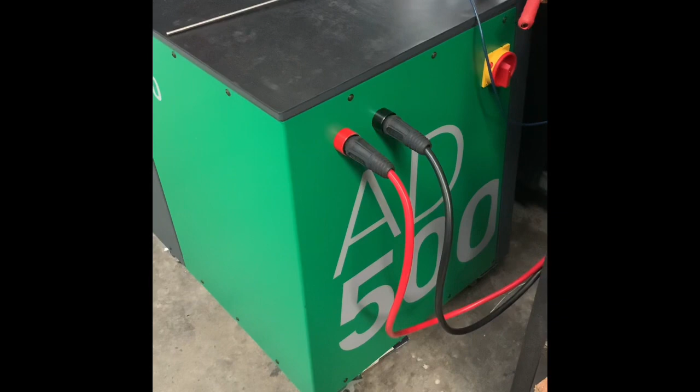So here we have it, the AD500 from Autodiagger in Poland. There's our battery connections there, which are the leads which go to the alternator case and the power feed, used on the starter motor as well. The big emergency stop button for if anything sort of turns pear-shaped.

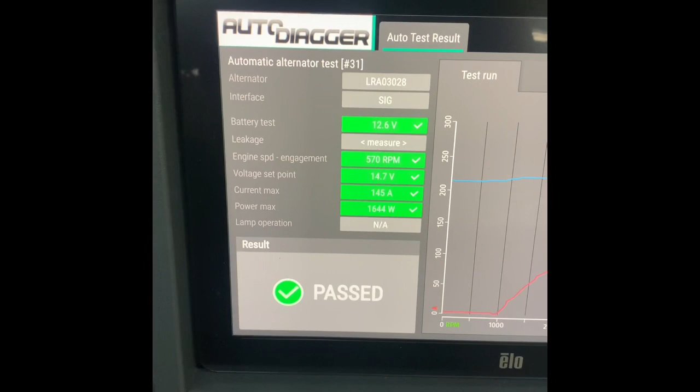This is the screen here, which has an interface to show us what's been happening, current versus voltage, and a couple of other tests there which show up red or green depending on if it's a pass or a fail. So the last alternator that I did actually was a pass.

Down here is where we connect into the alternator for various different things. We have a battery feed, a W, which is for your wave, your phase terminal, your DFM, which is your feedback terminal. This is a percentage of how hard the alternator is working to achieve the voltage. Your COM terminal, which we'll be using for COM and LIN BSS systems, but this is also the terminal you use if you're doing an RVC GM or an SIG Ford system, and your traditional lamp there as well.

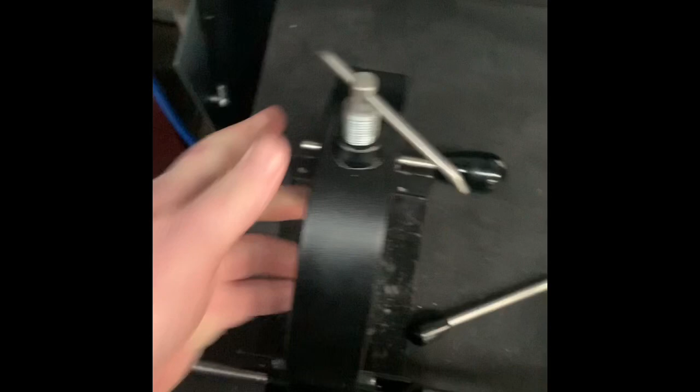Has a hatch here. Put the hatch down and you can use the machine. If the hatch is up, you can't use the machine, just for safety. Has a mounting system here, a couple of different adapters. This stuff all slides, adjusts, screws down, so it's very much a multi-fit. So there hasn't been anything that I haven't been able to put in here, or that I've struggled to put in here. It's all been fairly straightforward.

Here is the belt. And the belt is wrapped around the motor at this moment. The motor actually has an automatic adjuster, so all you have to do is slip the belt on the alternator and push the button, which is here, and it auto tensions the belt. What I'm going to do is I'm going to get an alternator into the test bench, and once I've done that, I'll start back up again and come back to you.

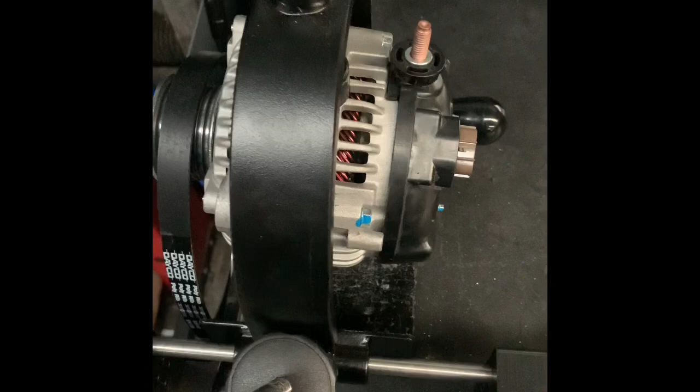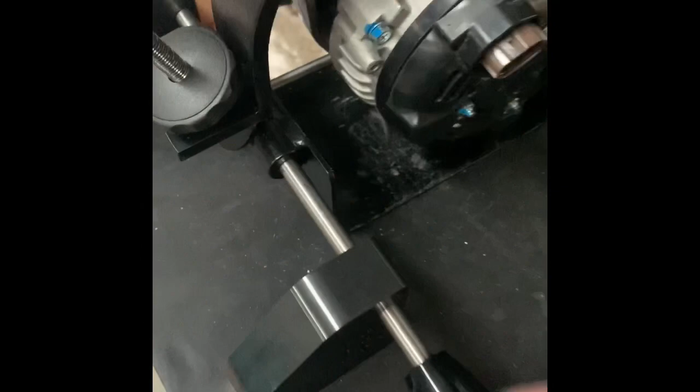Hey guys, we're back. As you can see, I've got the alternator mounted in there. It's like a clamp style system. A couple of rods in here to help hold that all together. Some adjustment rods there. Then we've got the thread there which clamps it down, and then the thread on the top there which you can tighten up the alternator.

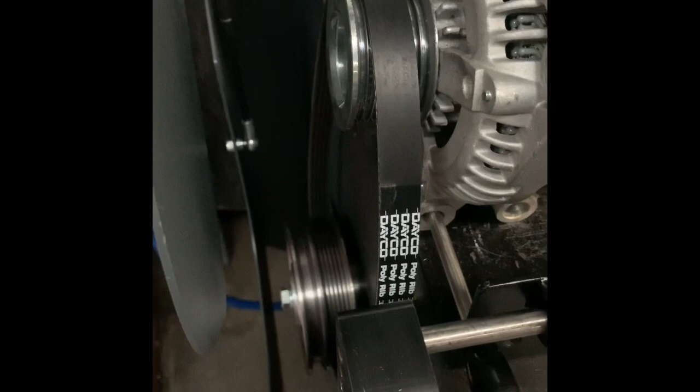The next thing is the belt tensioner, which I'll just tension up now so you guys can see that in operation. And it automatically tensions the belt for us. That's handy. We're going to be testing an alternator today, which is off a Land Rover. So it's the Ford SIG system, 3-pin plug there.

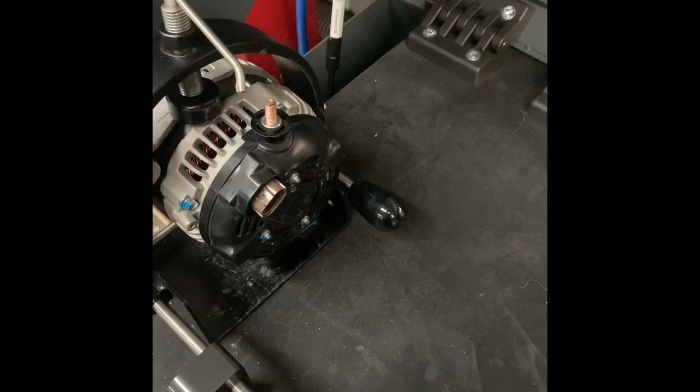We've got this alternator to check. It's an aftermarket alternator already that's been fitted to a Land Rover. It's been on the vehicle for approximately 8 months, I think. Customer has been having issues with it, and the original person to fit it is denying any sort of warranty on it. So we're actually getting it in to do basically a test on it, confirm that it is actually faulty, and the customer, the owner of the vehicle, can fight it out with the supplier of the product, which wasn't us, it's one of our competitors.

Generally they're pretty good, so not sure what's going on there. Anyway, not for us to say.

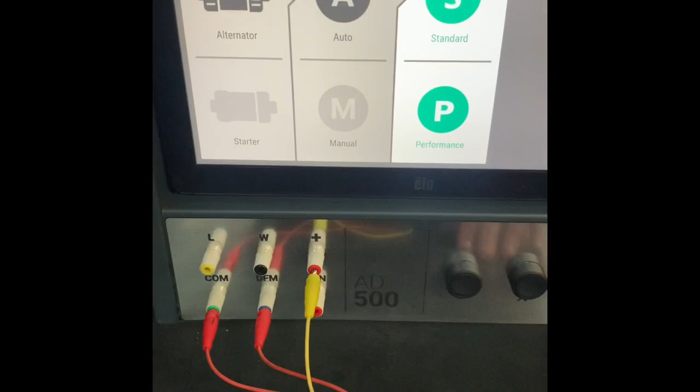We'll plug the alternator in, 3 wires for the Ford system, which is your battery feed, your feedback, and your command signal. Connected into the machine here. I'll select the alternator. What we're going to do is an auto test. We're just going to do a standard test for now in this video, because I just want to see what this alternator does under a standard test.

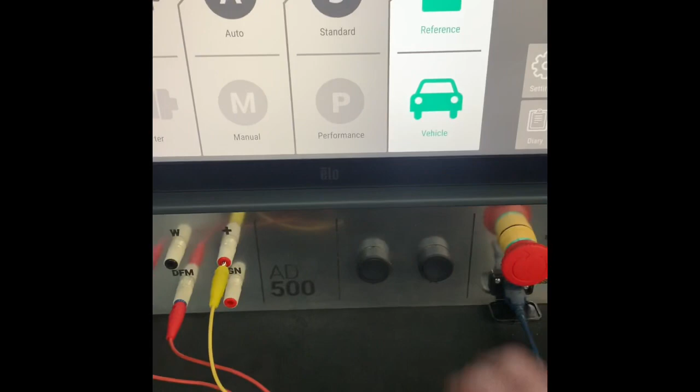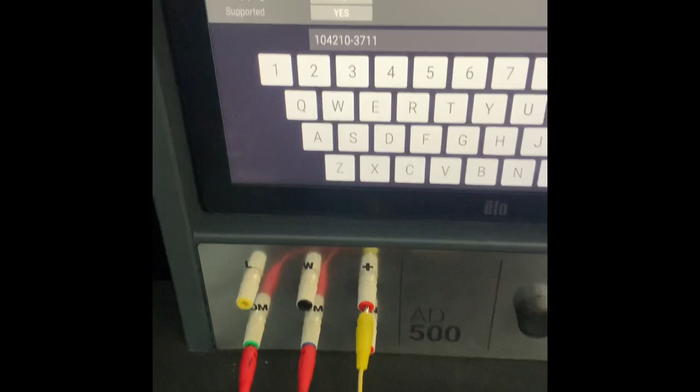Reference: this alternator doesn't have an OEM part number, but I've managed to cross over the supplier's part number to something that's pretty close. The only difference is the supplier's one doesn't have a clutch pulley, but the part number that I've got here is an alternator that does have a clutch pulley. However, the alternator pulley diameter is identical, so I don't think this is going to be a problem. And that's the alternator number we've used.

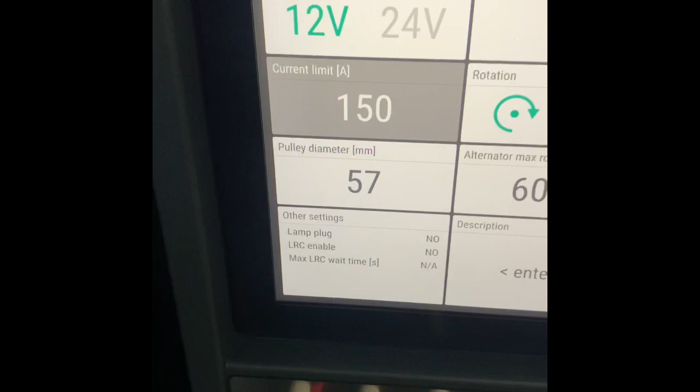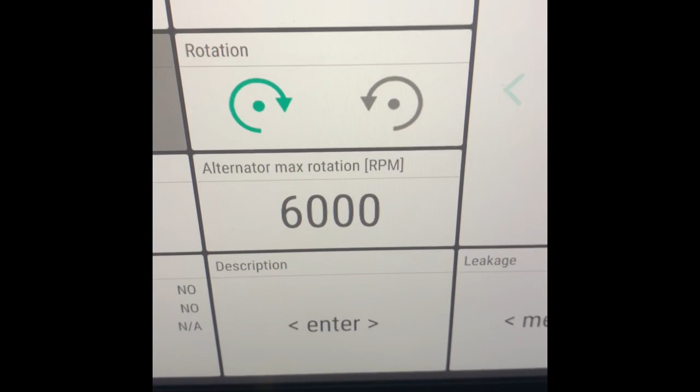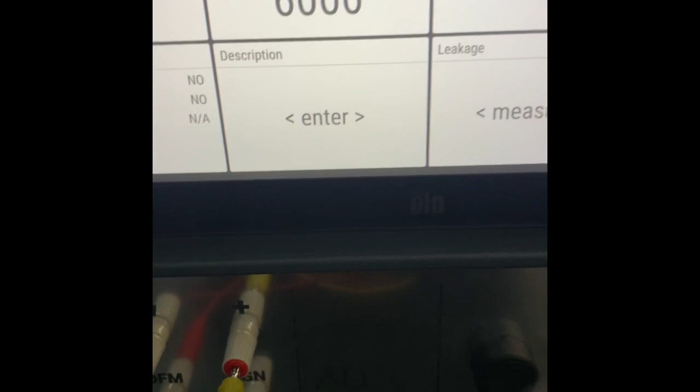Okay, so we're testing 12 volt. It's going to be a current limit of 150, which is what these Land Rover alternators are. Rotation is clockwise. The interface system is SIG, which is your Ford system. Pulley diameter of 57 mil. Description. We can put in here any description. We'll just do Land Rover alternator, or Land Rover.

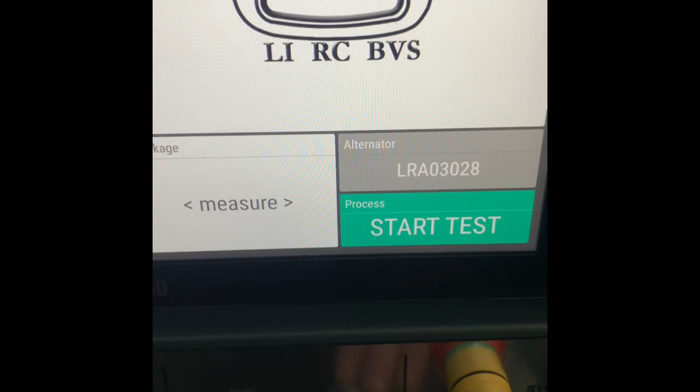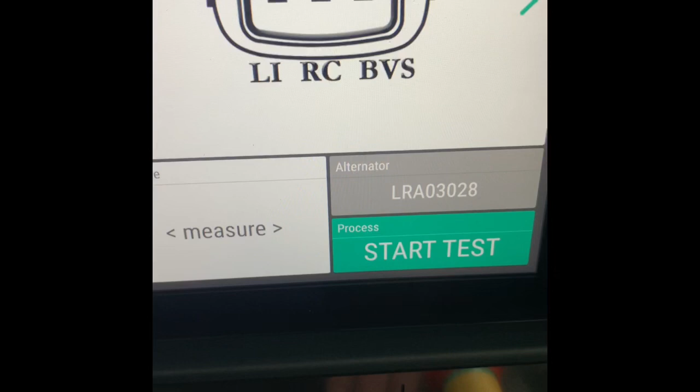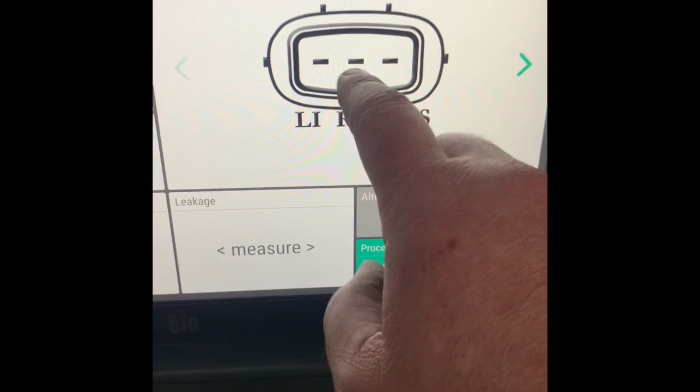Okay, this is our connection system, LIRCBVS. This is the same system that the Americans use. The terminal designations are called something different. Between the European Fords, the Australian Fords, American Fords, and Land Rover and Volvo, they can be called something different, but the pin placement, those terminals all do the same thing throughout all of those different systems. Well, when I say different systems, the different names that the different manufacturers give them.

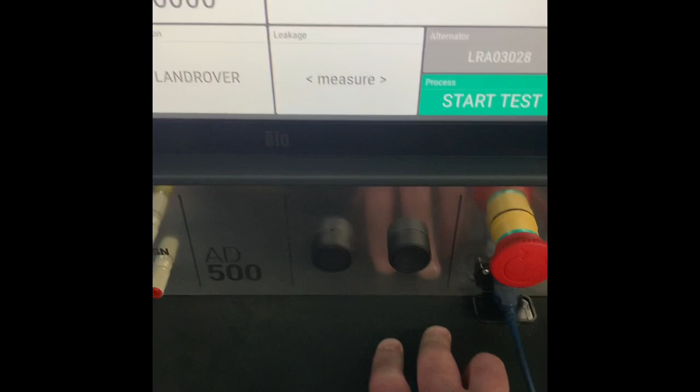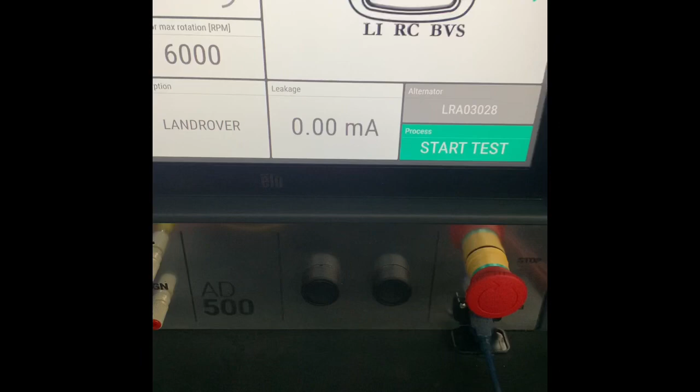Right, so we'll just hook up the power feeds and the ground onto the alternator. We're just going to get a good connection here. Okay, so we've got the alternator connected up here with our power feed and our ground onto the body. What we're going to do is we will do a leakage test. This will just check the static current draw of the diodes, just in case there's any of them out. Hoping it should be 0. That's it. Right, now we can start the test.

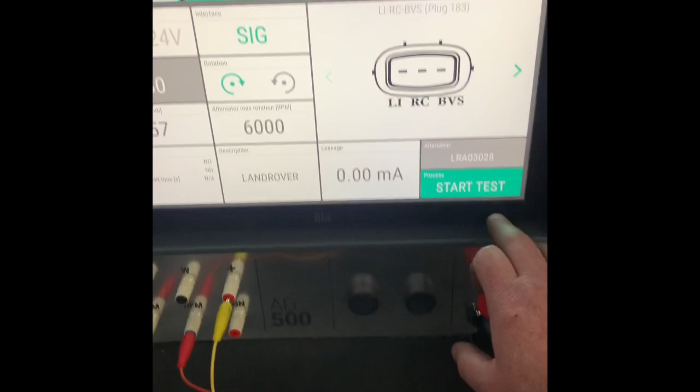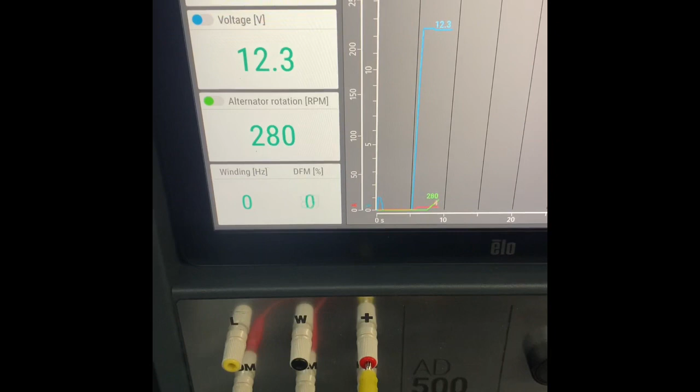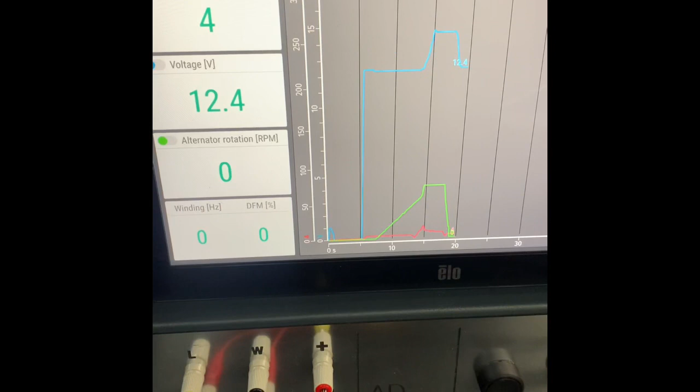First of all, we're just going to close the hatch, lock it up. Belt's tight, and here we go. We're going to start this test. So the machine's going to connect the voltage up. Clicks away, 12.4. It's going to start rotating. DFM terminals at 94%, which means it's working really hard already because of the slow RPM. As the RPM increases, it comes down, whilst there's little current load.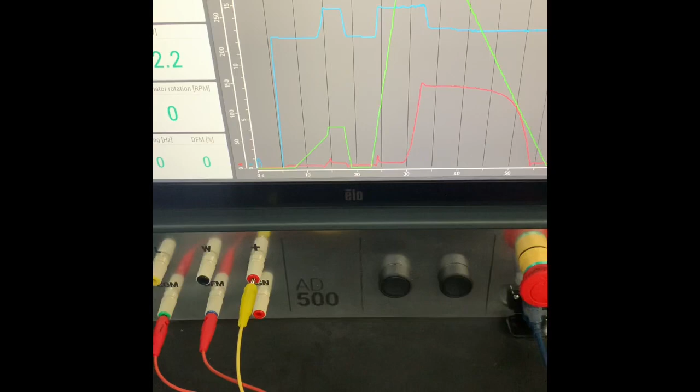Well, we certainly didn't get the 150, I don't believe. I don't think I saw that 150. And as soon as any sort of decent load, 130 or more, came on, the voltage just dropped away, as you can see there with our graph. So I'm expecting this to be a fail. Yep, and it was. And that's a failed test. So we can print that up the top there.

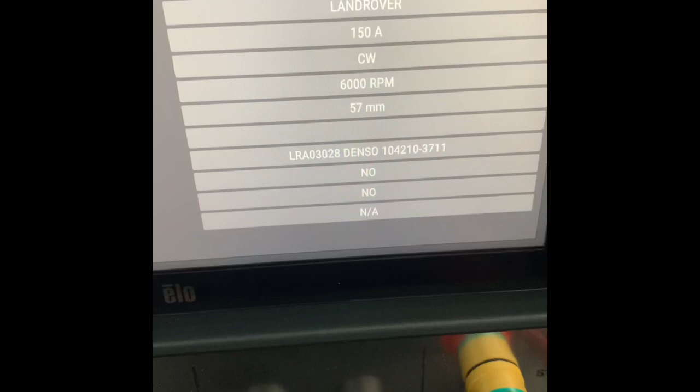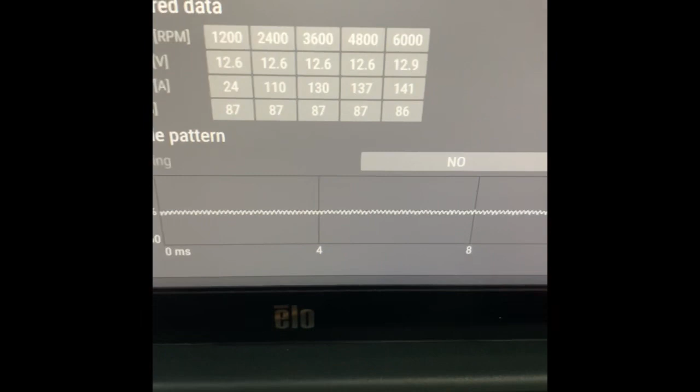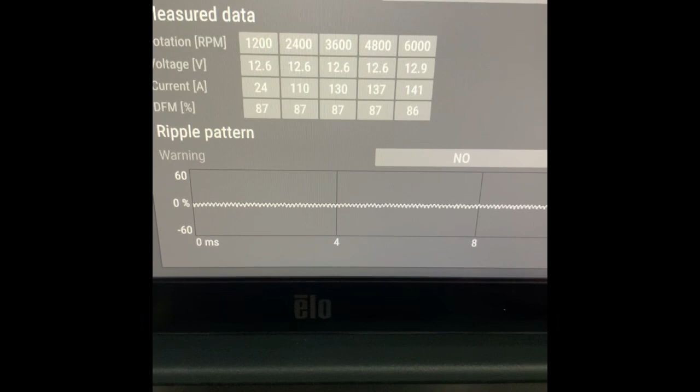We can go through the setup, stuff that we did before. Time on this machine's out because it's not 7:30 at night. It's probably only about 3:30 in the afternoon. I'll have to set that up. And click on to other. Bits of information there. Any warnings? No. The alternator ripple. Pretty good.

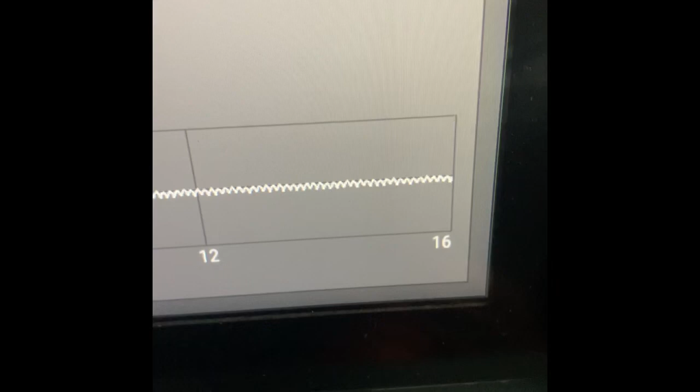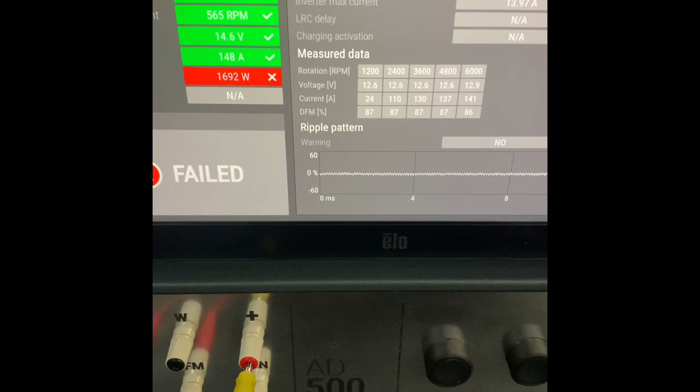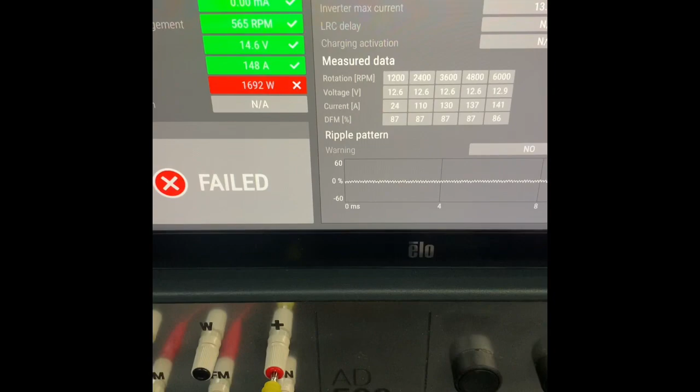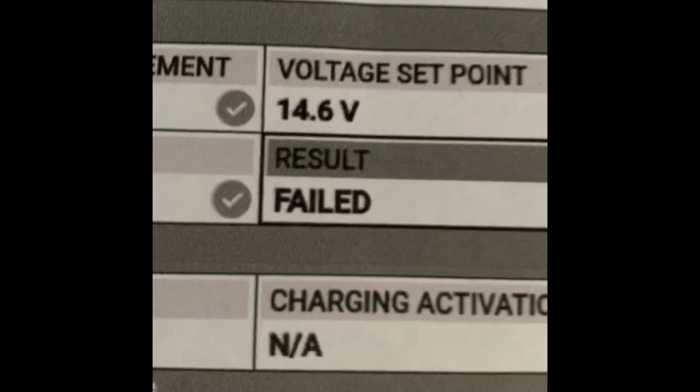So what's our issue? Well, we'll have to do some further testing on the alternator to confirm that, but that's really not what we're doing. That was for our client to go back to the supplier and say, just don't think that this is working correctly. So there you have it. Here's our AD500. Here's the printout sheet. It gives you all the information. Result: failed. It was no good.